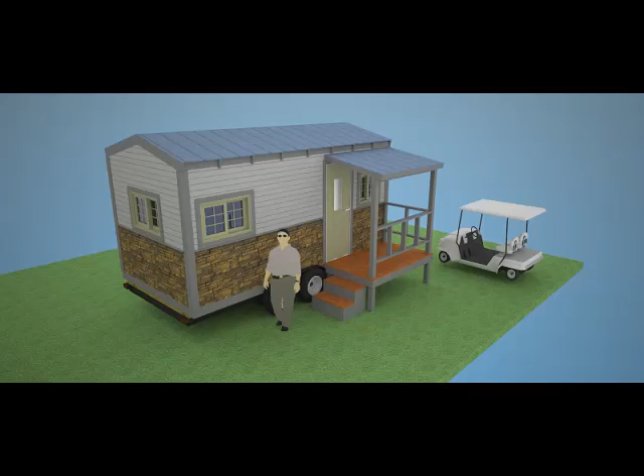I'm going to do something different than I've done in the past. I'm going to teach you how to design your own tiny house, off-grid house, or house on wheels.

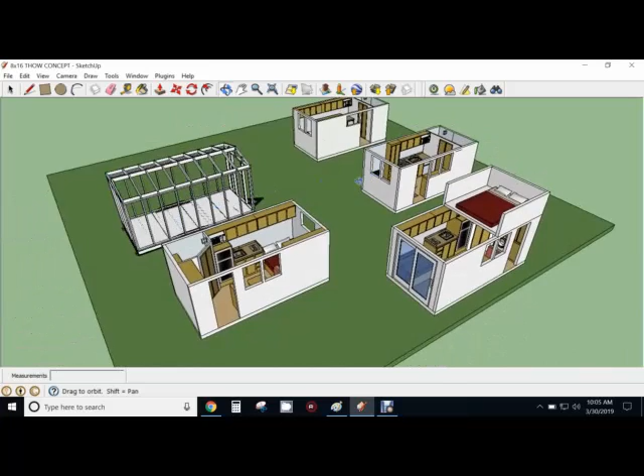What I'm going to use for a demonstration is an 8 by 16 house that can be modified in many different ways, to be built either on the ground as its own unit, or built on wheels on a trailer like this.

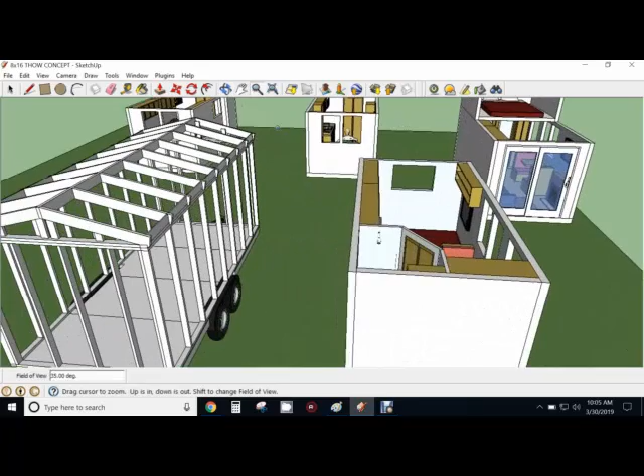The trailer I'm using is a 7 by 16 trailer, also called a car hauler, which is commonly available and sells brand new for about $3,500, or you may be able to pick one up a lot cheaper. Or you can build this unit directly on the ground.

I will show you how to build it either on foundation blocks like I used for my cabin, or on a cement pad, or even on skids. There's a lot of different ways you can build this.

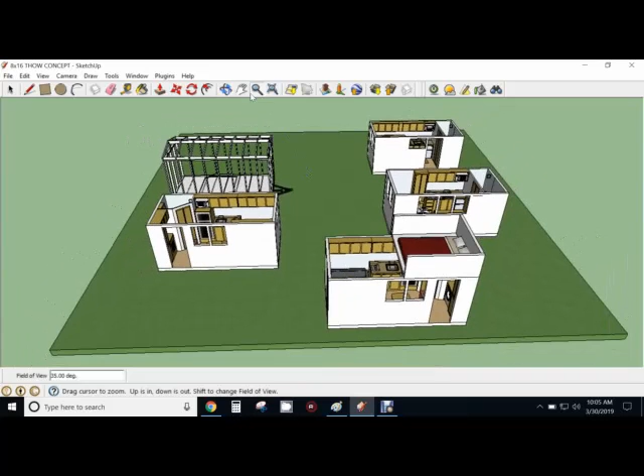I'm going to show you around these units first before we get into how to design your unit, and show you all the different ways this little 8 by 16 can be used. It's probably one of the best sizes to build, whether on wheels or as your own off-grid cabin.

It doesn't require any special cutting or special building skills. Just about anyone, if you can draw a straight line and cut a straight line, you can build this off-grid cabin or tiny house on wheels.

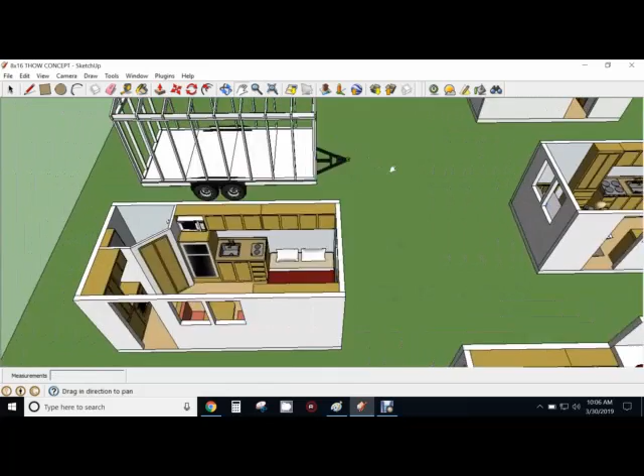So let me explain what we have here. First, go to my website, simplesolarhomesteading.com. Up at the top, you'll see a link for 8 by 16 house on wheels design SketchUp. Download that — that's this program right here.

If you don't have SketchUp installed, you can get the free version. I use SketchUp version 8 — the old version — because before Google took over SketchUp, it had a lot of features designed for more advanced artists and draftsmen like myself.

But it has the same basic features as the free version, SketchUp Make. Just Google SketchUp Make and download that for free. Then you can upload this into your SketchUp version, either version 8 or the new SketchUp Make.

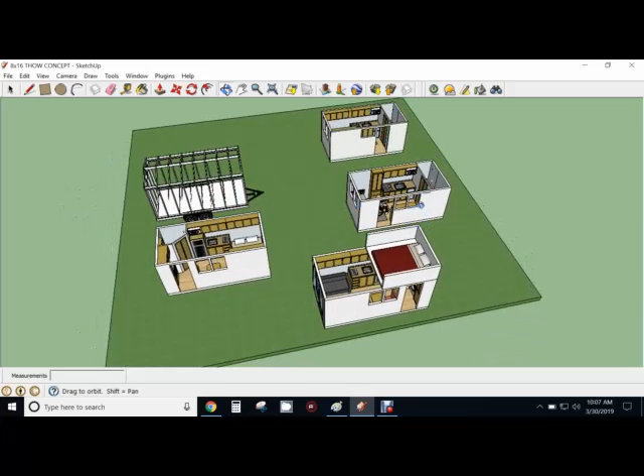Then you can follow along with what I'm doing here for the design, and you'll have all of these different features and components to use in your own design. I've taken a lot of the work out of it and made it a lot easier for anyone who wants to design one of these units.

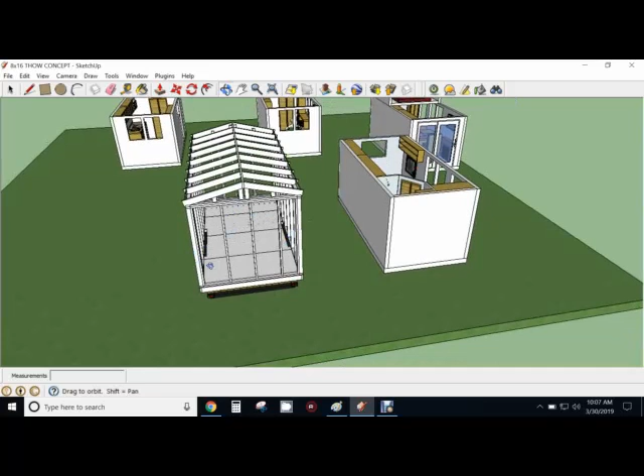So what we're going to start with is designing an 8 by 16, and I've just got the rough framing shown here. What I did is an 8 by 16 with 2 by 4 framing, and I'll zoom in here a little closer.

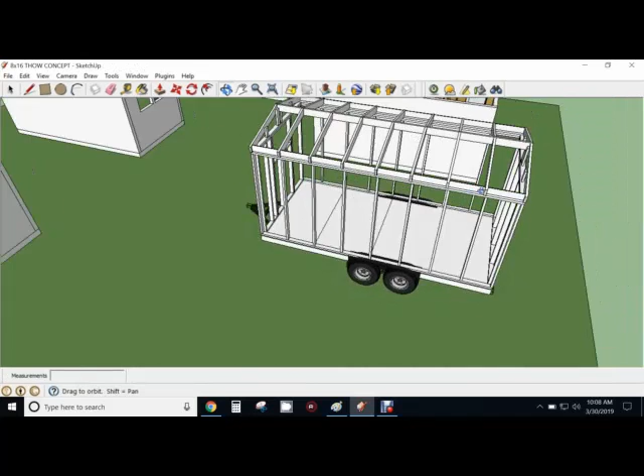This is on 2 by 4 framing — let the camera adjust here for a second. This is an 8 by 16 with 2 by 4 framing, 2 by 6 flooring, and 2 by 6 rafters.

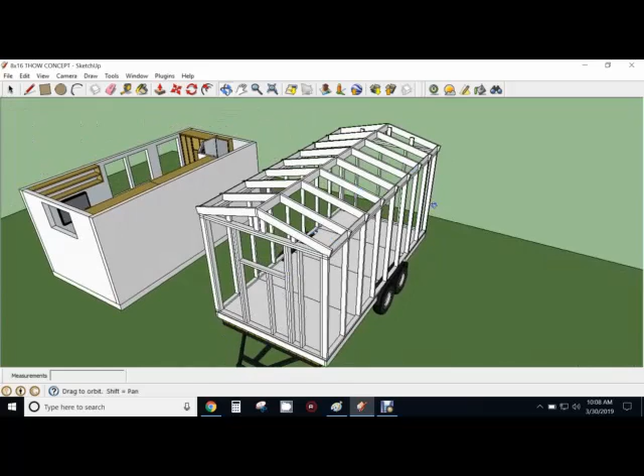Very basic construction. Now, I don't show any doors or windows in this unit except on the back end, because where you place your doors and windows is completely optional — it's entirely up to you and will depend on the floor plan you use. That's what I'm going to show you here.

These are the different floor plans that can be used for this design. This one is basically a design I borrowed from an RV design, and I adapted it for this 8 by 16 house on wheels.

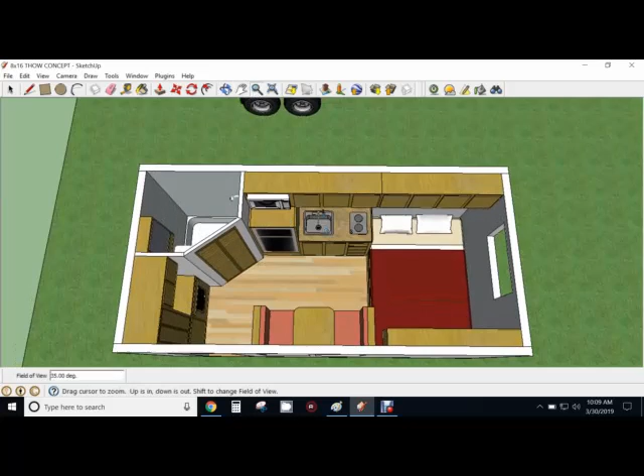This is a really nice design in that the floor plan has a lot of room. It has a queen size bed over here. Underneath the bed you have storage, plus more storage you can put underneath here — I don't show the doors, but there's more storage underneath the bed. You've got storage cabinets above the bed, more storage cabinets, and a small kitchen unit with a 2-burner stove.

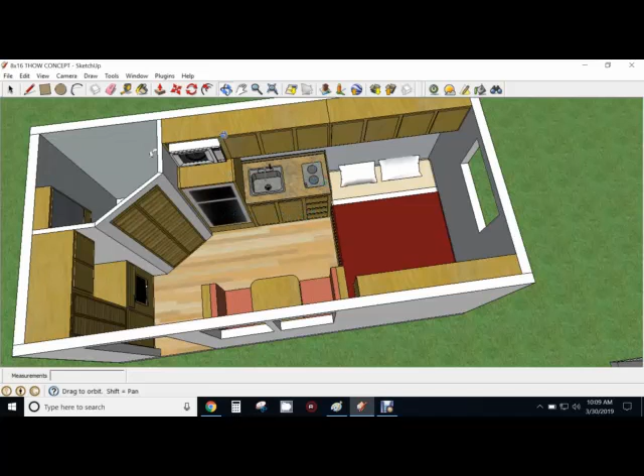Shelving and storage underneath it. This is an RV style fridge, designed to size, with a place for a microwave and cabinets up above for food storage.

Now these are all optional. You can change where these are and how you have this set up, but I really like these built-in units because they take up a lot less space.

So here I've got a restaurant style booth, big enough for 2 people. These 8x16 units would be a good size for 2 people. With the addition, you could go with 4 people, but for these 8x16s, I'd say this is a good size for 2. I've got a flat screen TV over here, and some book storage up above the bed.

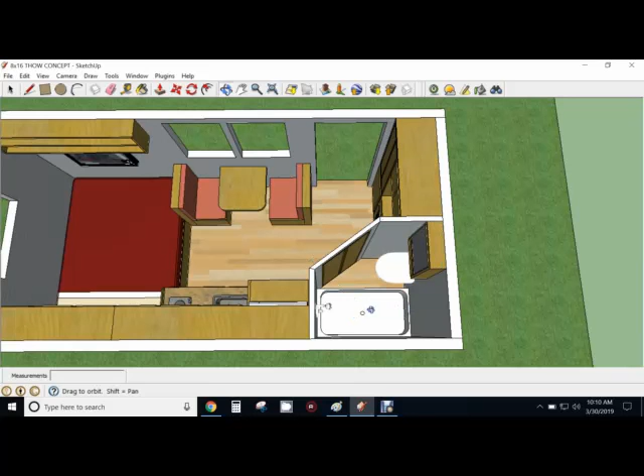This has an RV-style tub. It's an actual tub, but not like one you'd have in your house. It's a little shorter and not as deep, but it still allows you to take a sit bath, and especially women like that so they can shave their legs and whatever. But it also acts as a shower, so I've got it set up there.

I've got the shower, and I've got an RV-style push pedal toilet shown in here. You could use a composting toilet if you want, or just an RV-style porta potty, or you can buy these fairly cheap RV-style toilets that don't have a tank on the back. They take up less room, and then they flush into a gray water system or a black water system.

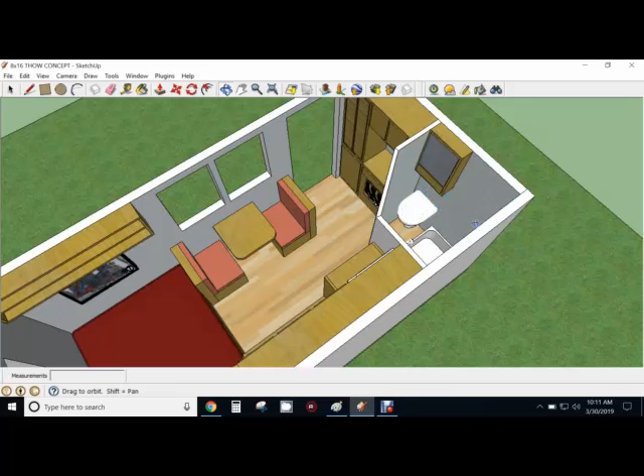I just got a little cabinet in there for the bathroom. And you can see I've got a lot of nice room in here for you to enter, with 2 big windows over the booth. As you come in, you could put another small sink or other equipment right in here. Here's your RV-style propane stove, more cabinets, and here's your closet for clothes storage.

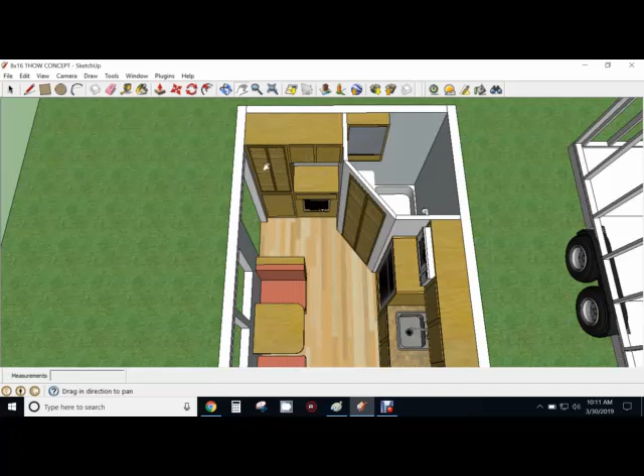So you've got a lot in that little unit right there. You got a lot of storage space and a real nice design for 2 people, okay? Just a really good general design for 2 people with the bed, and I like this.

The bed is on the first floor. Your bed can also act as a couch. You can sit on the edge of it here if you got more people. But it's on the first floor, so us older people that don't like to get into lofts, this is a really good design.

If you don't like a loft on your house, which I have a loft in my cabin, but generally I can tell you climbing up a ladder when you get older with bad knees and a bad back isn't the best design. So these are mostly designed for a person that doesn't want to get up in a loft.

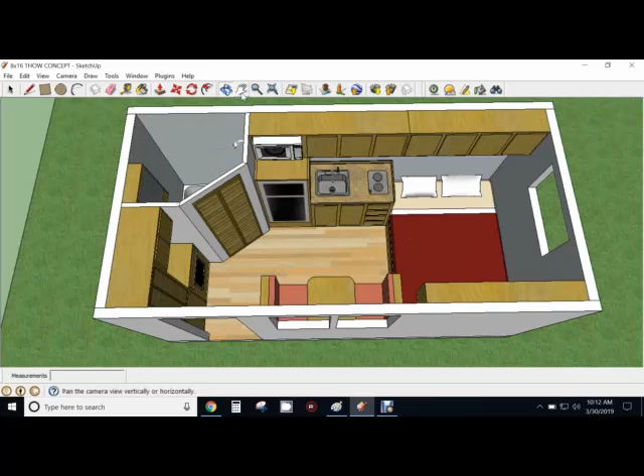However, you can build these little lofts, and that's the other design I show here. We'll go over here. Whoops, not that one. This one here. If you want to build this up, then it's easy to do.

Instead of the 8x16, now on this back side here you go up to 10 feet, and that gives you room for your loft. In your loft you can have a queen-size bed, and you'd have a ladder here to access the loft, and you can put windows wherever you want. I'd put a window on this back side over here, but this gives you a queen-size bed loft if you want one, and that gives you the room.

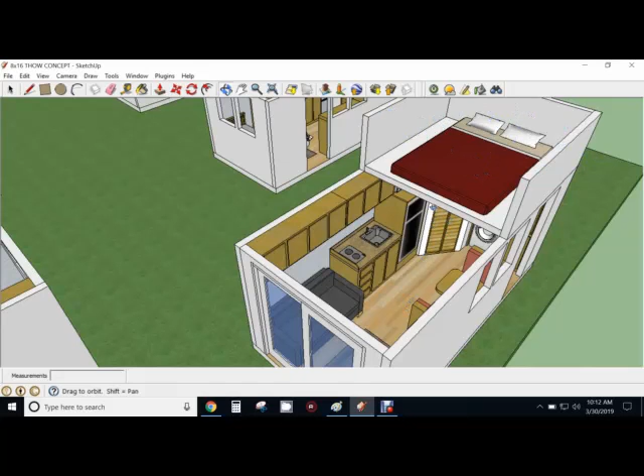We'll just pull this off. Whoops. Take me just a second here. I got to hide this so we can show you underneath.

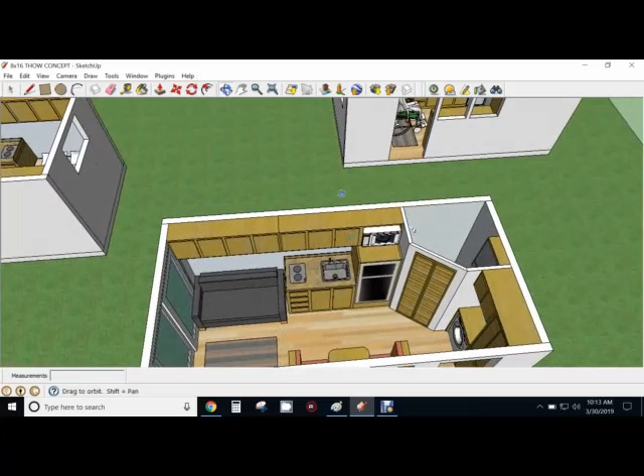Okay, without the loft, then I've changed the design. You can see that I've moved the door. Instead of the door being on this end over here, I just shifted the door to the front end, okay? I've got a door in the front end over here.

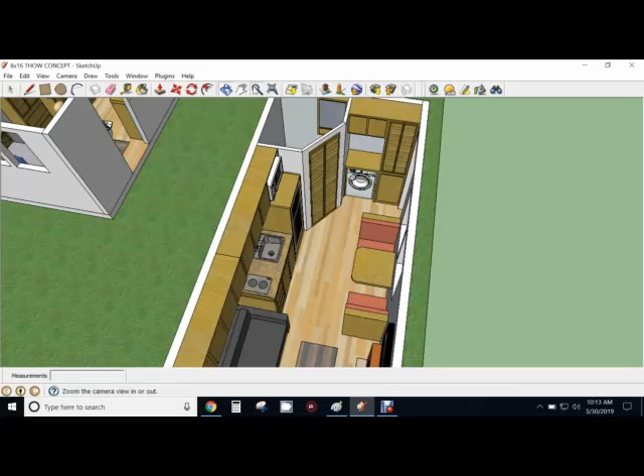Same basic cabinets that you have, although I show this with one of those small apartment-style washer dryers. And these are really nice. You can get these that'll run off just 110 volt. Because it's right next to the bathroom, all you do is just run the hose through to the shower, and you run the water out that way. So I've got that set up here.

You've got your place for your clothes storage. Same bathroom design, I've still got the RV-style tub and toilet in here, but I changed the kitchen around so it faces the other direction. And since you've got a loft bed, you're going to be sleeping up in the loft, now you've got space for a living area. And I did a really nice design here.

On this back side, I actually did 2 French doors. Now, this is just optional. You could have windows here, you don't have to have French doors, but I really like this design with this open look in here.

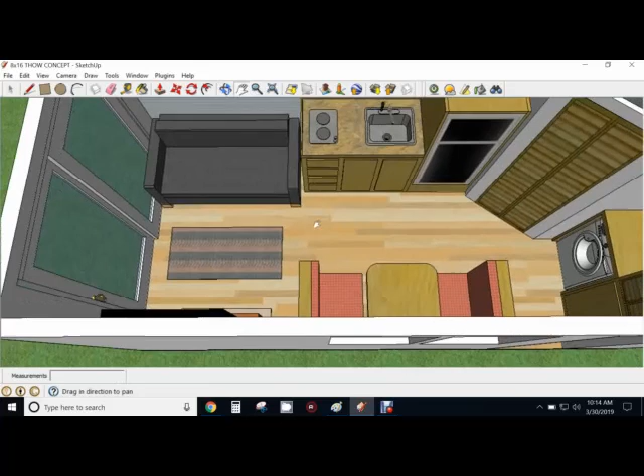And I've got a couch, and this can be a couch bed. This can be one of those sofas that folds down into another bed. So this would actually sleep 4 people. You'd have 2 people up in the loft, or 2 people or 1 person down here. I've got a nice kitchen unit, the RV stove, and I still put the booth-style restaurant in this one here.

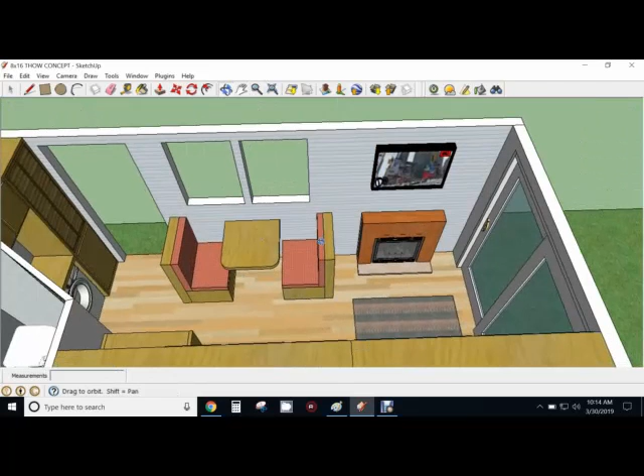And I've got storage up above for the kitchen and up above here. On this other side, just to add some ideas, here's a propane-style fireplace. You can have your own little fireplace, and there's your flat screen TV. This is a really nice design, and still this is just an 8x16.

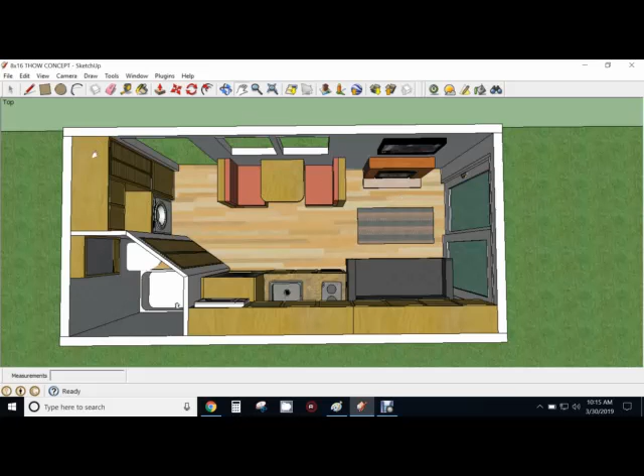The only difference is I added up so that you could have a loft bedroom on this design. That's a nice little floor plan. I like this. It's got nice room in here, very open, very easy to access everything. Corner bathroom, washer, dryer, fireplace, a couple of French doors, nice living area, and then up above you would have your loft bedroom. So that's another way that you can design this 8x16.

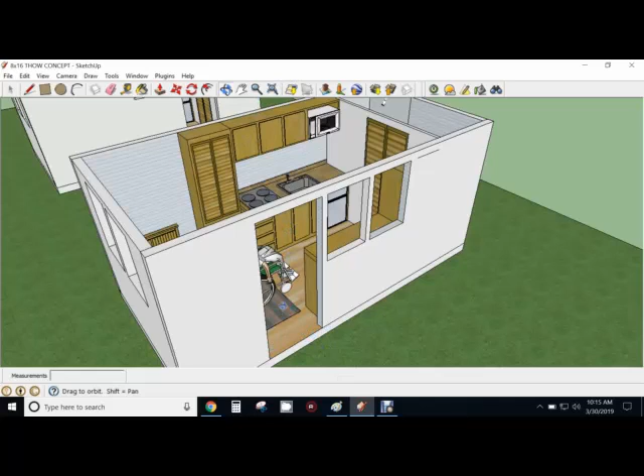Now I'm going to rotate around. I think that this 8x16 would also be a really good design for people that have limited abilities or possibly in a wheelchair, for a single person. I've designed this so that it has features that make it easy to access for a person who has limited mobility. I've got a nice wide door here that's wide enough, a regulation size, to access for a wheelchair. I show a person here in a wheelchair just to show that they would have room to function and move around here.

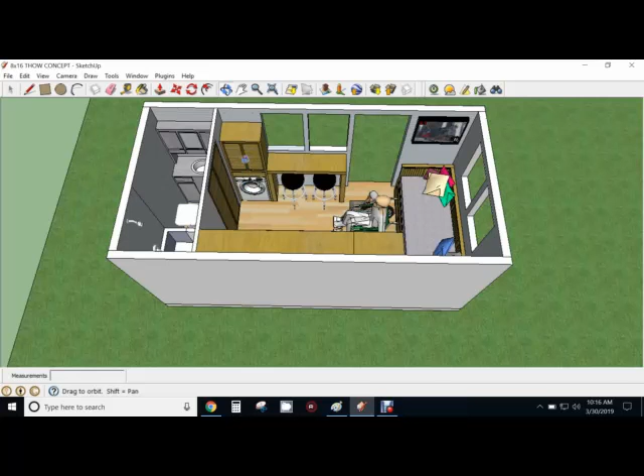Instead of the booth, I've put in a bar-style kitchen with two bar-style stools. Here I've moved the washer and dryer over to a unit over here. This would be your clothes closet and storage up here. I'll zoom in here. You've got your washer and dryer down here.

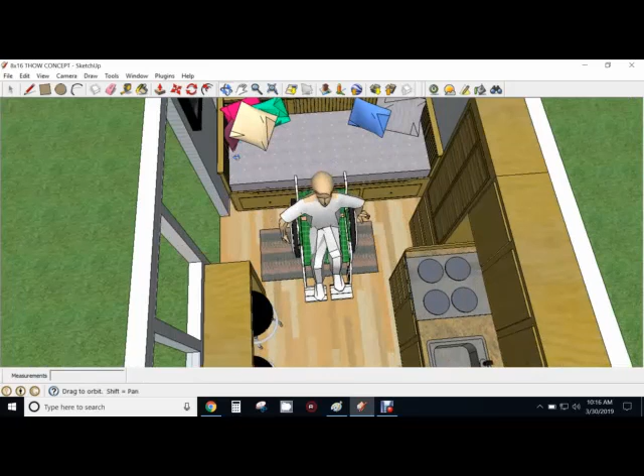Instead of a single bed, what I've put here is a day bed with storage underneath it. This is more accessible for a person in a wheelchair because they can get in easily, they can get to their clothes and stuff that are underneath, and they've got the day bed for laying around, which also acts as a couch. On this side I've got their flat screen TV so you can watch TV while you're lounging and resting in your bed. Easy access to get in and out for a person that's in a wheelchair or just has limited mobility.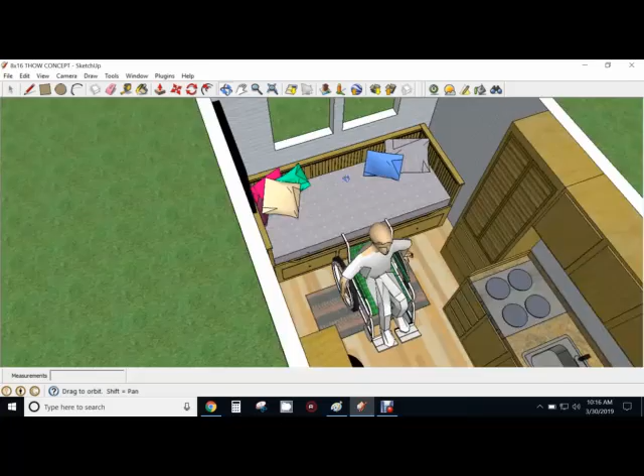You may not want this for a wheelchair, but one thing that a lot of us older people have to consider is that at some point in our houses we may end up in a wheelchair or using a walker or a cane or something like that. So we need a house that will grow with us as we grow older so that it will still function. This is a nice unit for people that are considering that they may end up having to have a house that fits their disabilities.

Again, I put a bigger sink in here. This has a 4-burner stove instead of the 2-burner stove, placed for a microwave. If this was for a disabled person, I would put this microwave down on the counter here instead of up here, and you may want to lower these cabinets if you're actually accessing them from a wheelchair. This is just for design ideas. Another good storage cabinet with 2 drawers underneath it for your clothes, and here instead of the RV fridge, I use a small apartment-style refrigerator, good for one person.

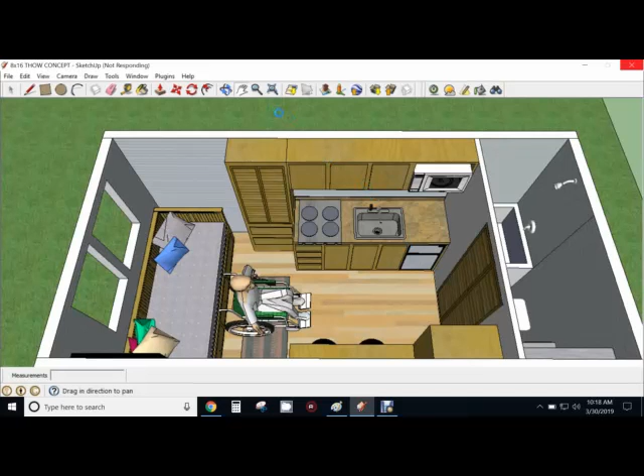Now the bathroom on this unit, got to wait for this to catch up again. The bathroom on this unit is really nice. In fact, I love this bathroom. I'd like to have done something like this in my cabin. You've got 2 wide doors that just fold open, or it could be a pocket door that slides into the wall, but I would have folding bifold doors here.

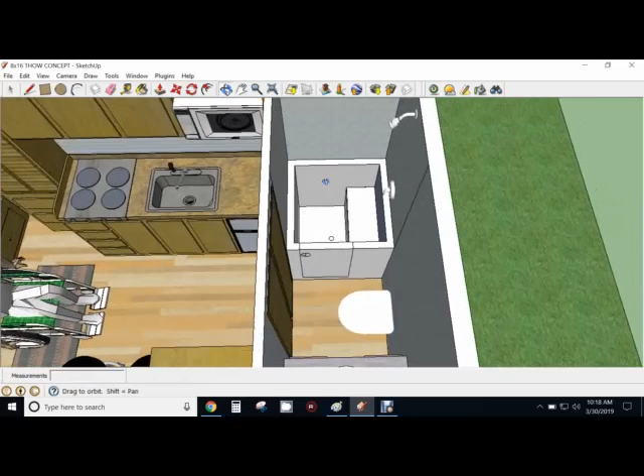This has, I designed this with a walk-in tub. Now you can actually build these. They're expensive to buy, but you can actually make these, and they show you how to make them online. You can go and look at how to make those. This has a little door that you open up and then you close. It has a shower head, but it also can be filled and used as a sit tub, and it has a seat.

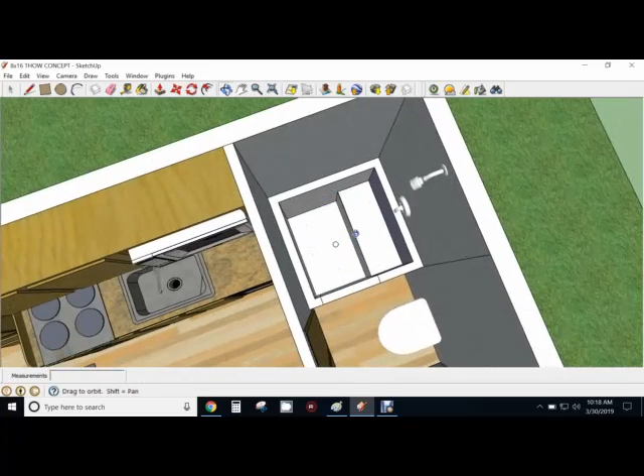You can sit and bathe comfortably. This is really good for a person that has leg or back or knee problems and has trouble getting in and out. A regular bathtub isn't very helpful for them. This is a really nice, deep tub that they can fill up and use here in their small house. I've still got that RV-style toilet. And then on this side, I put in a traditional-style sink with your medicine cabinets and your cabinets for storing your towels and toilet paper and all your bathroom goodies.

Here in this unit here. Now, again, these are all adaptable. These are just for ideas.

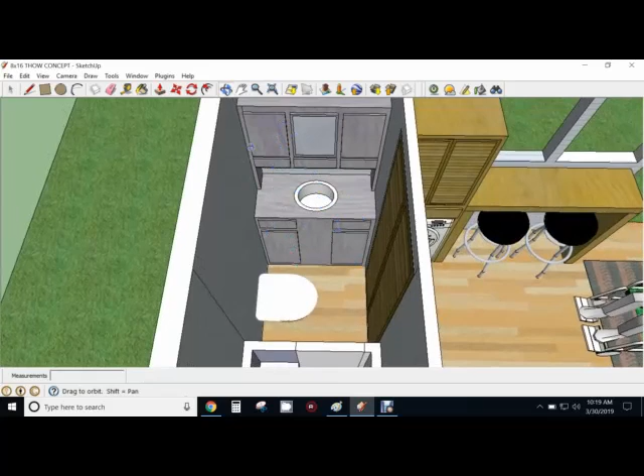I show these with all the different features. I even got tile on the bathroom walls and white beadboard skirting on these. You can change the colors on any of this too, you don't have to keep the colors that I use.

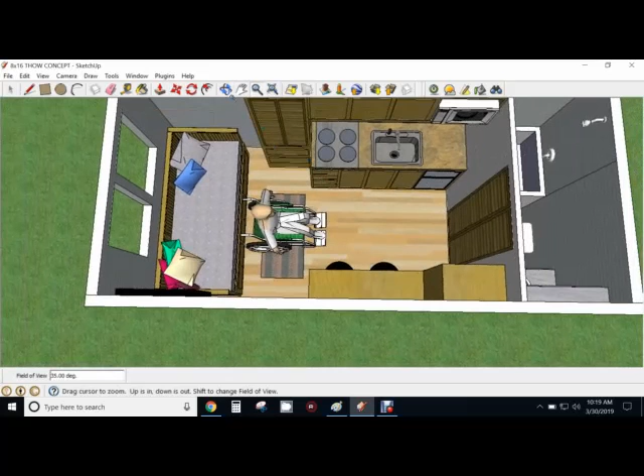I just go with kind of modern style colors, I think. Now, this is a really good floor plan. You can see that the outside framing here is the same as that first one, except I put 2 windows in this back end instead of the French doors, with a day bed.

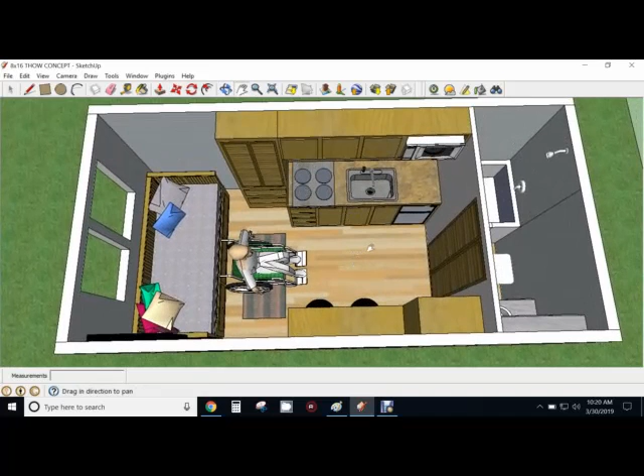This would be a really great floor plan that could be built on the ground. I would suggest on the ground if it's for a person that is going to be having a wheelchair or something like that, because it'd make it a lot easier to access. But this could still be built on wheels. If you just like this design as a single person, it doesn't have to be just for a person that has disabilities.

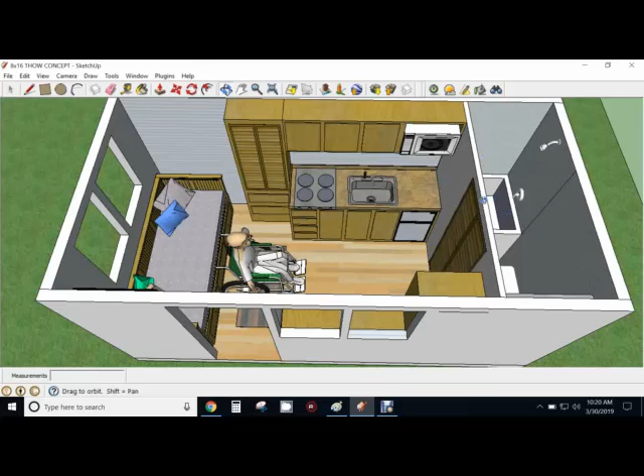If you like the day bed instead of a regular bed and use it as your couch, this would be a really fantastic design for just a single person, or even 2 people if you want to build the loft. Like I showed you in that other one, you could still have the loft built up here with a full or a queen size bed, and use the day bed as a couch down this way. Just another idea for a floor plan.

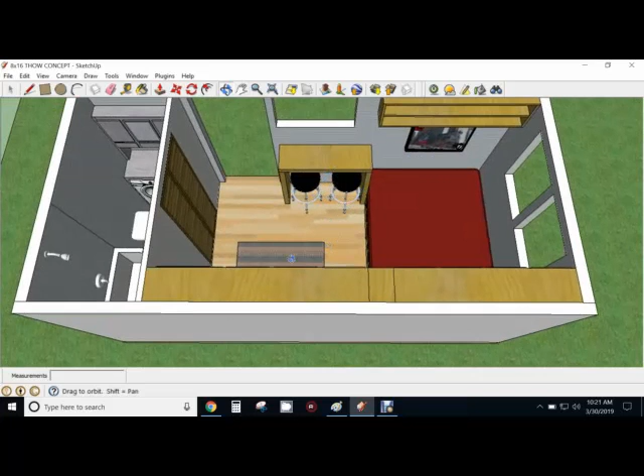Okay, now we're not even close to being done here. This one is designed to have the full size bed or the queen size bed like was in the first design, and instead of the booth, I've went with the bar and bar stools, which gives you a little bit more room in here. A lot of people don't care about having a traditional table, so here you've got a couple of bar stools and a bar with a nice window up above it.

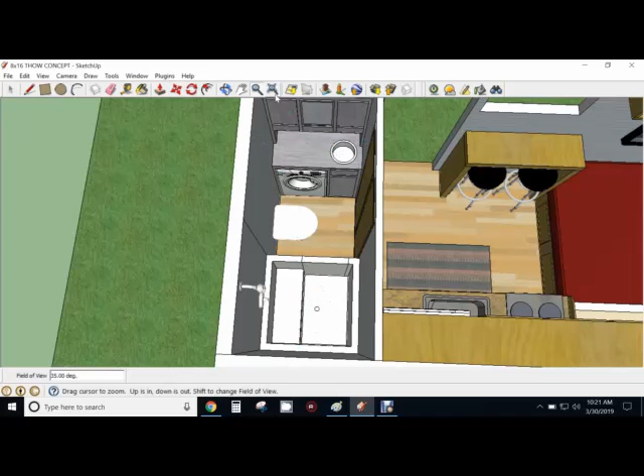On this one, I kept the same bathroom that we have in that other unit. This still has the walk-in tub and shower, the kitchen sink over here. However, what I did differently is I put the washer and dryer in the bathroom. So now instead of having it out in the living room, you've got your washer and dryer right there in your bathroom, along with your sink and storage for all your towels and bathroom stuff. That's another design idea.

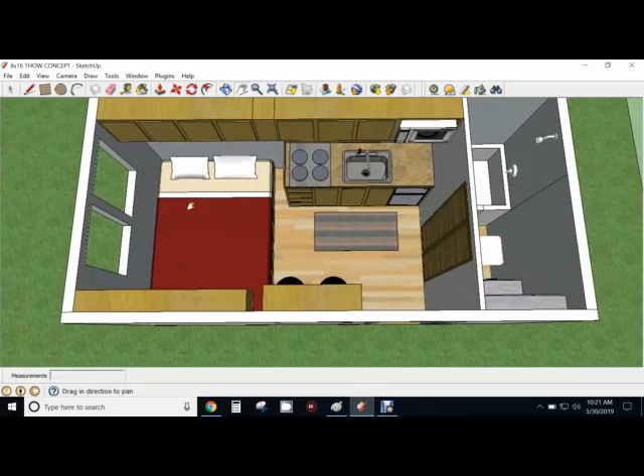This is just another floor plan that can be done on that 8x16. Again, if you wanted to, you could still build the loft on this end with another queen size bed. That gives you a queen size bed downstairs, queen size bed upstairs in the loft, so it sleeps 4 people.

But if you don't want the queen size bed here, you could do the couch instead, making this a living room again. So these are all just different designs. The only difference in this one is you've got the larger bathroom with the walk-in tub, and your washer dryer is in the bathroom. Basically, I've just organized these a lot differently.

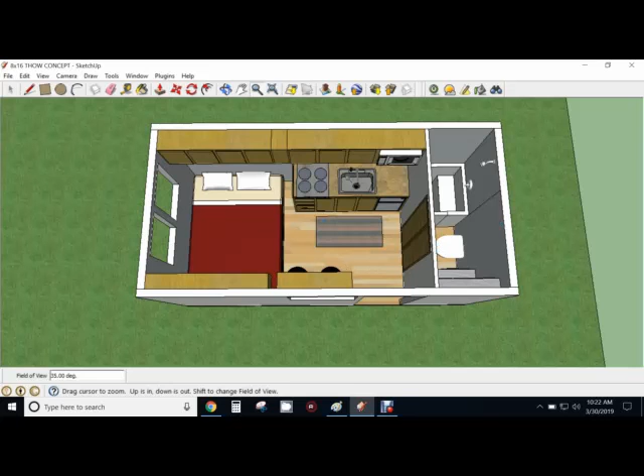If you like a big bathroom, then you might like this floor plan. If you don't care about a big bathroom, then go with the corner shower unit and you have more floor space. It's all the difference in what you want to be doing here. And those are the 4 floor plans that I come up with.

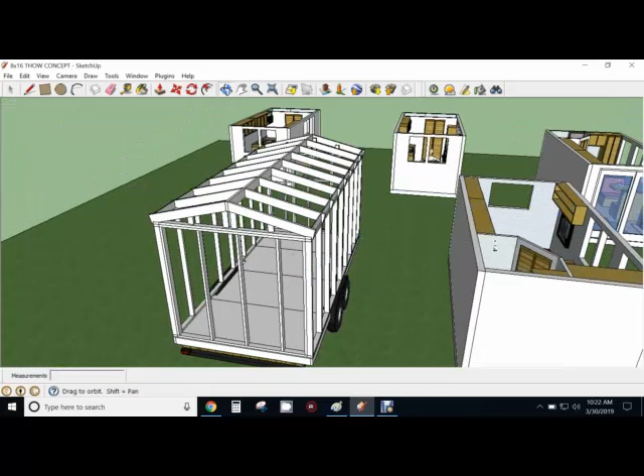You could probably come up with your own design too. So those can all be built. Every one of those is 8x16, and all of these can be built on this same basic platform that can be used in many different ways, either as a standalone unit on a foundation, on a freestanding foundation and deck block, or on a trailer.

Now I'm going to show you how to design these. I'm going to take you step by step from building one of these right from the ground up in the next lesson. So just follow along.

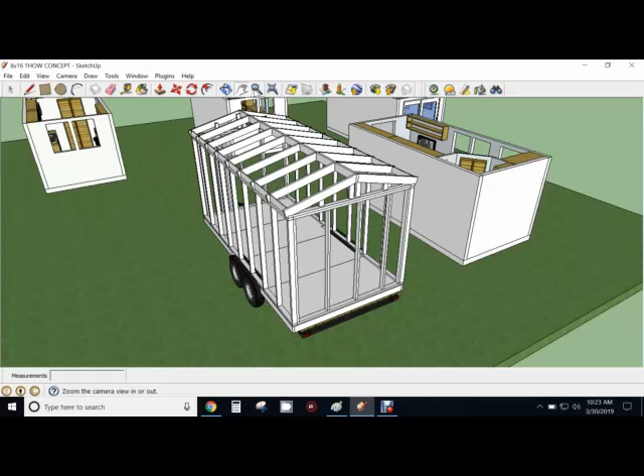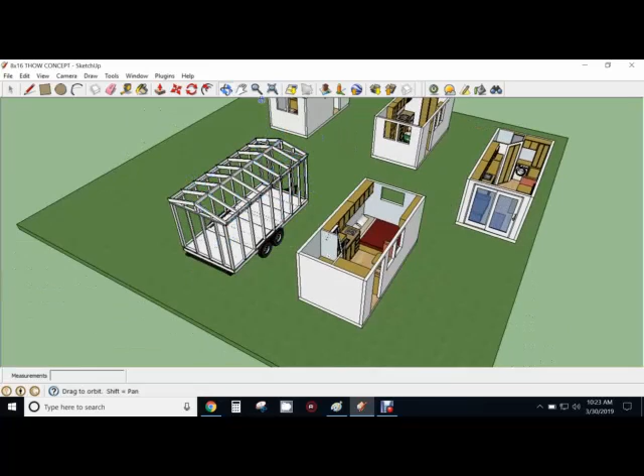I'm going to show you how easy it is to design one of these. If you understand how to design them, then you will also have a much better understanding of how they are built. If you understand how framing all goes together and is tied together, then building them is really not that hard to do. Even if you've never built anything before in your life, I guarantee you, if you follow along with these lessons, you're going to understand how these are all constructed and built.

So go get you a copy of this, and then click on part 2 of this video, and I will show you how we are going to design our own 8x16 tiny house on wheels, or standalone off-grid cabin, or mother-in-law apartment, or rental unit, or whatever you want to use this for. Okay, let's get going.